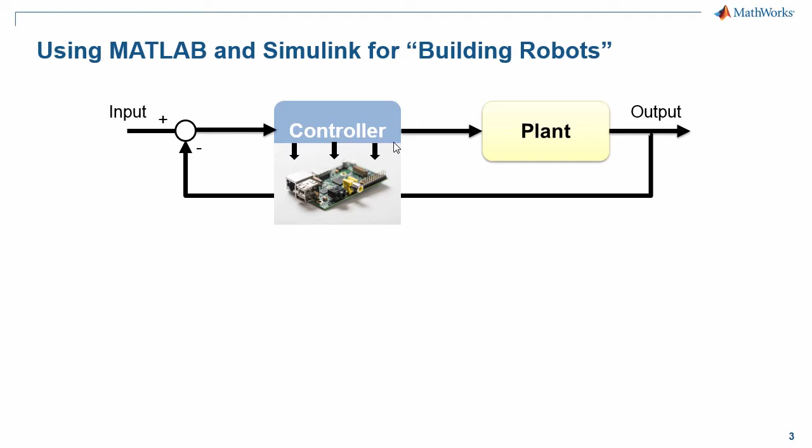MathWorks offers a comprehensive list of tools for modeling different types of robotics components. We already have customers that have adopted our tools for building their robots. We have the Festo Bionic arm here on the left side, and we have the DLR from the German Aerospace Institute humanoid robot. These two systems are advanced robotic systems, and as you can see, they perform advanced maneuvers, and the interesting part is that they are built using our tools.

So if you want to know more about this workflow, I invite you to check the webinar, How a Differential Equation Becomes a Robot. This webinar contains the details of this workflow.

Coming back to our classification, we have a second group, and that's the education space. Many professors contact me and tell me that they want their students to program a robot anywhere, anytime. This is an interesting challenge, so I see two options. The first one is to provide any student with a low-cost hardware robot, which could be a robot running on a Raspberry Pi or an Arduino board, popular low-cost hardware boards for robotics.

If this is the case, I'm happy to share that MathWorks offers a long list of hardware support packages so that students can program robots built with low-cost hardware inside MATLAB and Simulink. If you want to know more about this, please check this link that I'm showing you here on the slide.

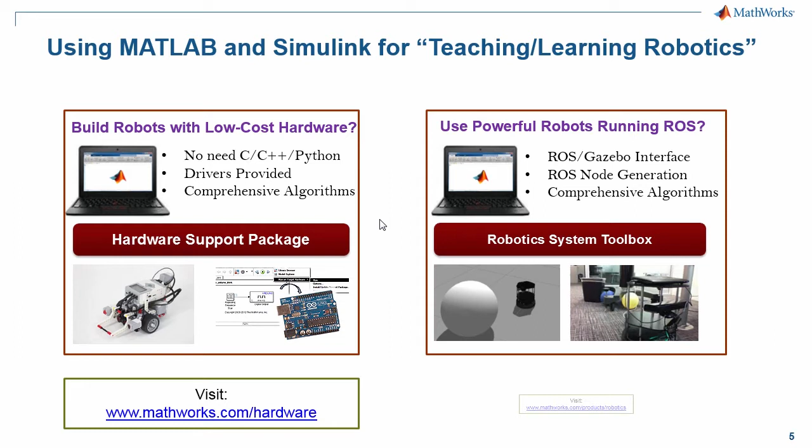But there's another option. Let's say you already bought a commercial off-the-shelf robot, which could be a more expensive piece of hardware, so it's very difficult to provide every student with this type of robot. But then you can leverage simulators. There are standard simulators nowadays that you can design your algorithm with. Professors want their students to design their algorithm using the simulator, and they want to have MATLAB and Simulink connected to the simulator. If this is your case, I'm happy to share that Robotics System Toolbox provides this functionality, but we're going to talk about this later on the webinar today.

The third group is also related to the previous one: you want to develop robotics applications using existing robots or simulators. Maybe you bought a robot, you already built your robot, and if this robot already has all the hardware components, you want to start developing advanced robotics applications. This is the core of my presentation today, and how you can use MATLAB, Simulink, and Robotics System Toolbox for this. Let me show you some examples of the type of applications that I mean.

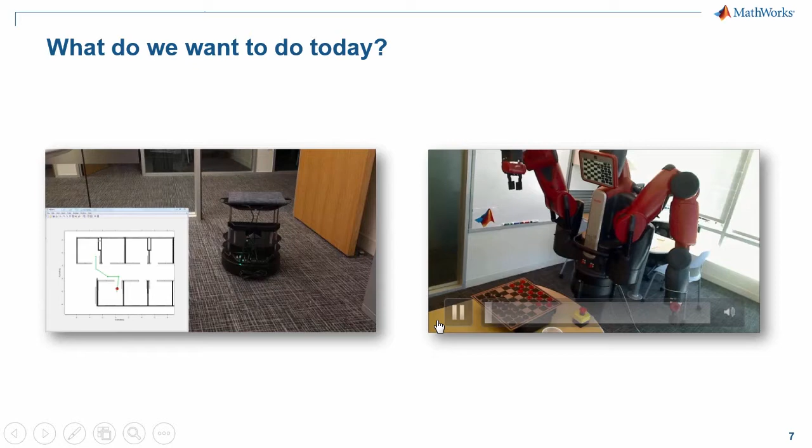Here you see on the left side of my slide a Turtlebot navigating autonomously through a floor plan using a representation of a map here in MATLAB. And on the right side you see the Baxter robot, playing checkers against a human.

So these two robots are commercial robots, and they share something, which is that they both provide a ROS interface, that is, the Robot Operating System. Now with Robotics System Toolbox you can connect to these two robots and develop your algorithm in MATLAB or in Simulink. For example, in these two examples I'm showing you here, the interesting part is that all the algorithmic part is running in a computer running MATLAB.

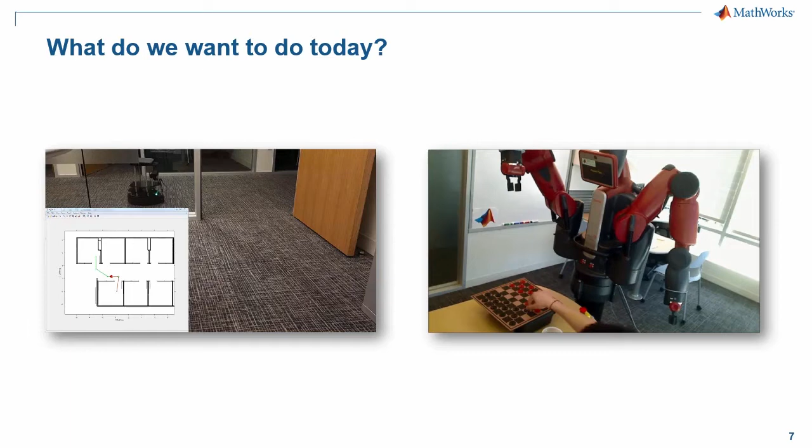So for example, on the case of the Baxter playing checkers, we are using functionalities provided by Computer Vision System Toolbox and Image Processing Toolbox to identify the board and detect the pieces. Then we are using MATLAB functions to actually move the robot and do some path planning, and finally send an end effector command so the robot can play checkers against a human.

These are just examples of the type of applications that you can develop, but of course it depends on your area. Some of you guys may be doing controls, maybe others can be doing computer vision, and others may be just interested in doing data analysis. All of this is possible now with MATLAB, Simulink, and Robotics System Toolbox.

So in terms of the agenda of the webinar today, I would like to start by showing you some features of the MATLAB ROS interface. How can MATLAB connect to the robot operating system? Then I will talk about some of the built-in robotics algorithms that Robotics System Toolbox provides. And finally, I'm going to talk about the Simulink ROS interface, because Simulink ROS interface allows you to connect Simulink, and also you can generate a standalone ROS node that can run on your robot.

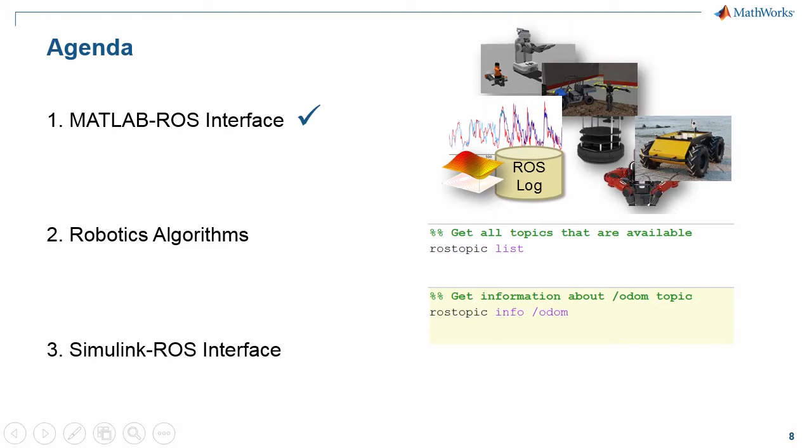So to start with the MATLAB ROS interface, let's ensure we have all the concepts clear. The interface to ROS-enabled robots and simulators is an important part of our toolbox functionality, as I mentioned. In case you are not familiar with the robot operating system, or most commonly known as ROS, I just want to give you a short intro. I know some of you may have already used ROS, but I also know some of you that probably this is the first time you hear this concept. So this is just a very short introduction.

At its core, ROS provides infrastructure for distributed communication in robotic systems. It's also called sometimes a middleware because it runs on top of Linux. The important thing is that ROS contains a collection of packages or libraries for solving common robotics problems. So this includes drivers to interface with sensors and actuators that are very commonly used in robotics, and it also provides some libraries for robotics algorithms.

So you may be asking, what does it mean when we say that MATLAB and Simulink are connected to ROS? Well, it means that now you can implement your robotics algorithms in MATLAB and in Simulink, and then use ROS to test these algorithms in a physical robot, or it could be also a simulator. So to assist you in the development of this type of algorithm, Robotics System Toolbox also provides built-in algorithms related, for example, to path planning and path tracking, which are very popular algorithms in robotics.

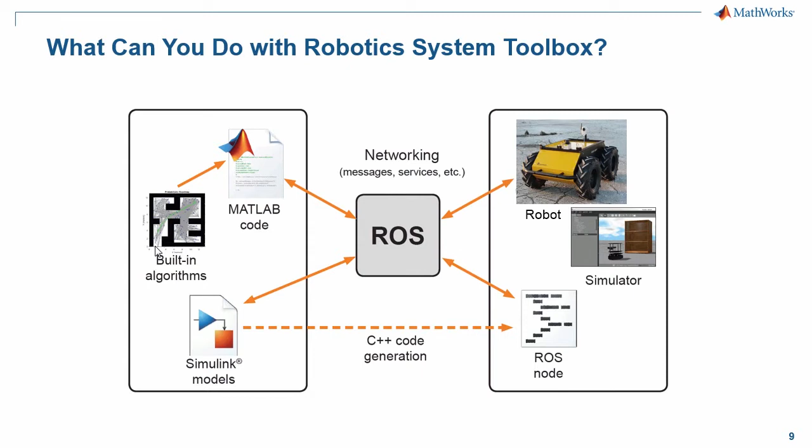So how do we pass data in ROS? And that's another concept that I want all of you to have very clear understanding of. There are two ways. Usually communication and processing in ROS happens through nodes, and you can exchange data through what we call ROS messages. There are two ways of sending and communicating data. ROS nodes can publish topics, and the nodes that are interested in getting that data subscribe to those topics. That's why we call it a publisher-subscriber scheme.

There's another way that it's a classical remote procedure call, and it's a client-server way of communication. That means that when the client needs information from a particular node, he requests that information, and then the service, when the information is ready and the data is ready, replies with a response, and then the client is happy because it gets its data.

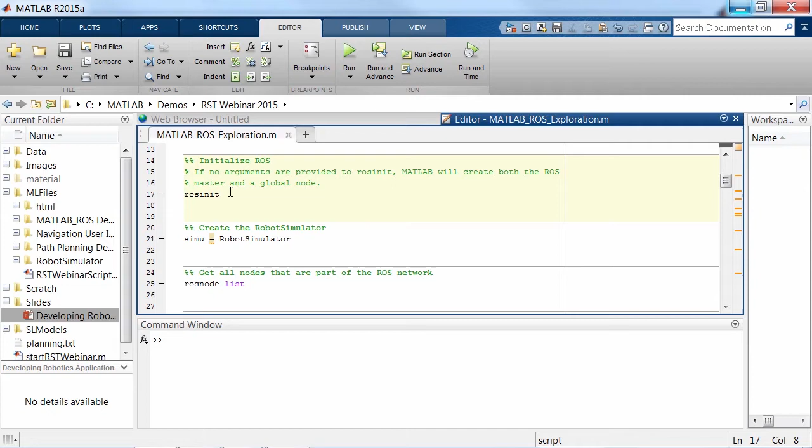The first function that I want to talk about is the ROS init function. This is a very important function because it allows you to create a ROS master in MATLAB or to connect to an external ROS master. If I want to connect to an external ROS master, you just need to specify the IP of that, which could be a robot or simulator.

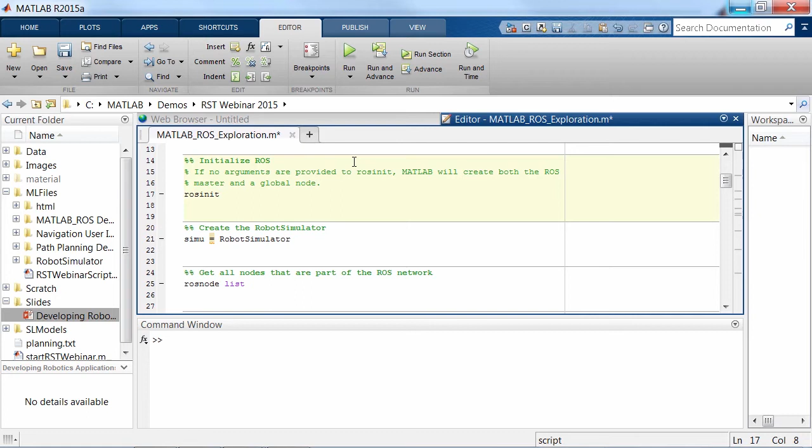In this case, I'm just making up some IP that will connect to that external ROS master. If you just call the function with no parameter, then MATLAB is going to initialize a ROS master, as you can see, and initialize the global node in MATLAB.

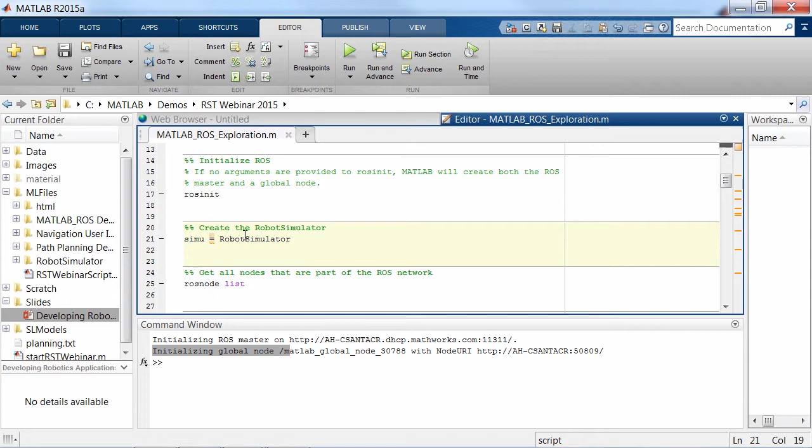Now I'm going to create an instance of a robotic simulator that we created in MATLAB that provides a ROS interface, also using Robotics System Toolbox functionality. I'll accommodate my screen so you can see both MATLAB and the robotic simulator, so you can see what this means. It's a mobile robot simulator, as you can see on the figure, with a laser range scanner simulation, a bumper sensor simulation, odometry sensor as well, and it's a differential drive robot.

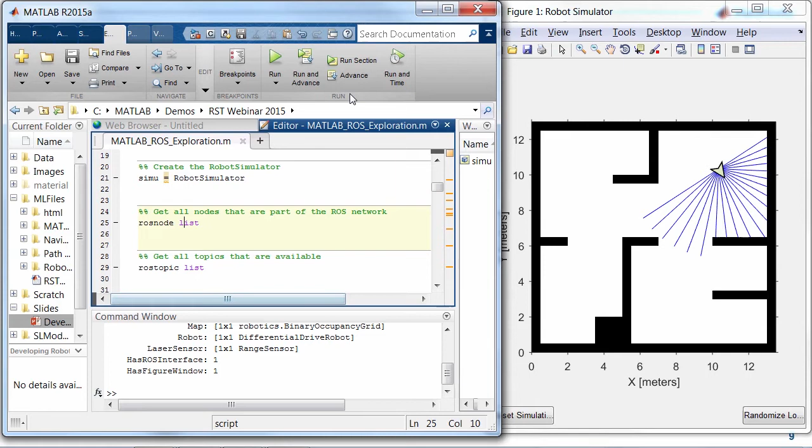If we now execute ROS node list, you see that the only node on the ROS right now is the MATLAB global node. How about ROS topic list? We execute this piece of code and we see these 5 topics corresponding to the velocity, which is the topic we publish to move the robot, the bumper sensor simulation, the odometry topic, ROS out, which is standard, and the laser range scanner topic.

If you want to obtain more information about a particular topic, we use ROS topic info, and that will tell us the type of message that the topic uses for transmitting data, as well as the nodes that are publishing to that topic. In this case, it's just the MATLAB global node and no subscribers.

We also have the echo functionality if you want to get data immediately about a particular topic. Let's see, for example, here in the case of the odometry topic, and we see the position and orientation of the robot. In this case, the robot is at 10.33, 10.34, and visually we can effectively verify that the robot is in that location.

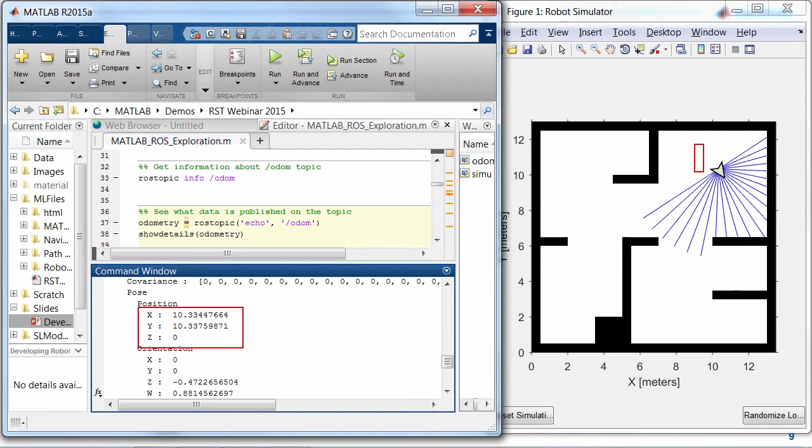Let's continue exploring some of the functions. You also have the ROS message show functionality if you want to get more information about a particular message. In this case, let's get more information about the sensor message laser scan, and that tells you the different parameters that that message has.

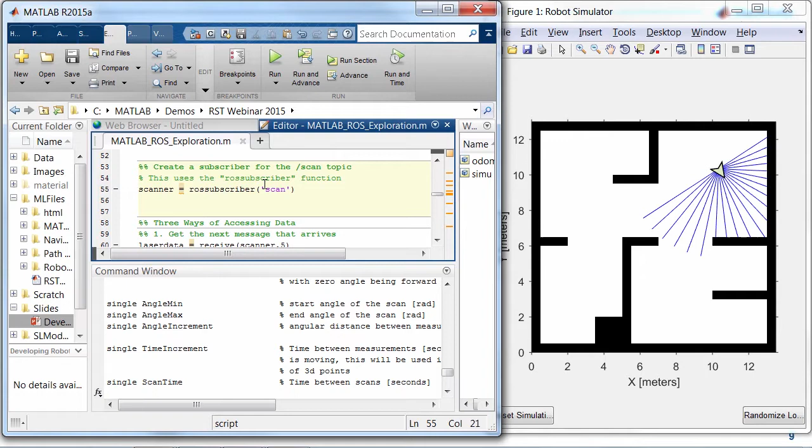If you want to get data now from the robot or simulator, we have to create a subscriber. In this case, let's create a subscriber for the scan topic, and we name it scanner. If we verify here on the MATLAB workspace, we effectively see that it created a subscriber object.

So in this case, let's just use the receive function. This 5 is just a timeout that you can specify. So now we got the data of that message. If I type here in the command window laser data, we see the different parameters of that message, the different information.

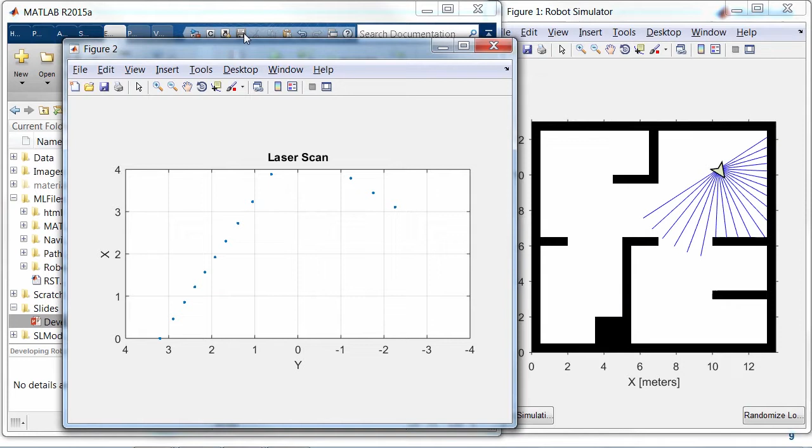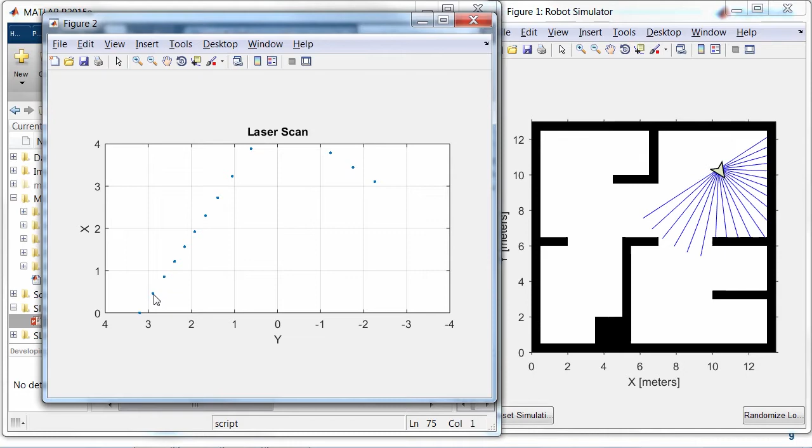Let's say that now we want to visualize that data. For advanced data types, we have some overloaded functions. For example, here, look that we are using the plot function directly on the scanner.latest message object. If we execute this function, we actually see the plot of what the laser range scanner is returning. On the right side, we effectively see that the robot is in one corner, and that's what the XY plot of that message is showing us.

So that's for getting data from the robot. What about if you want to send data to the robot? In that case, we need to create a publisher. We use the ROS publisher function in order to do this, and we specify the topic we want to publish to. If I execute this piece of code, this returns 2 objects: the publisher itself and the message that you're going to use to publish to that topic.

Now we configure the message. In this case it's velocity, so I specify the linear velocity and the angular velocity, and then we use the send function, using the publisher and the message, to actually send data. If you pay attention to the simulator, and I'm executing this piece of code multiple times, you see that the actual robot is getting the information and moving accordingly to the information on the message.

Let's reset that message, send a zero command to the robot. And now let me show you how easy it is to create a simple algorithm.

In this case, I just have a while loop. I'm getting the sensor data from the laser range scanner, and I'm detecting if I'm close to a wall or not. If I'm not close to a wall, I drive forward and send a linear velocity command, as you can see from the simulator. If I detect the wall, the robot should stop in order to avoid a collision.

So let's see if that's effectively what happens. It goes straight, and it should detect that wall at some point. And now it detects the wall and it stops. So that's just an example of how easy it is to start prototyping and creating your own algorithm.

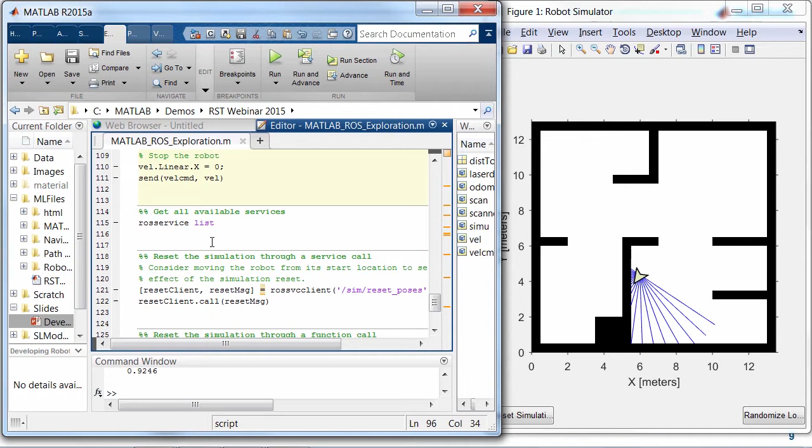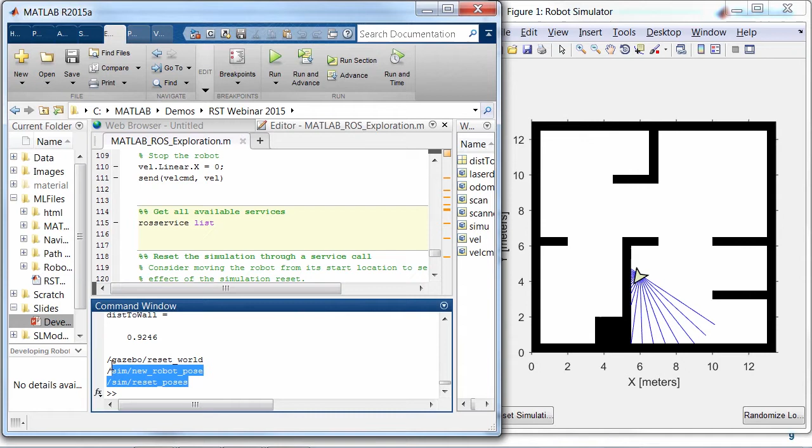So you might be asking, okay, do we support services from MATLAB? Yes. If you want to see the services, you use ROS service list, and that shows you the services this simulator has. In this case: reset world, new robot pose, and reset poses.

And if you want to call that service, you use the ROS SVC client function. You specify the service name, and then we call that service. And if you notice, the simulator went back to the initial pose before I started moving the robot, because that's what this service functionality provides.

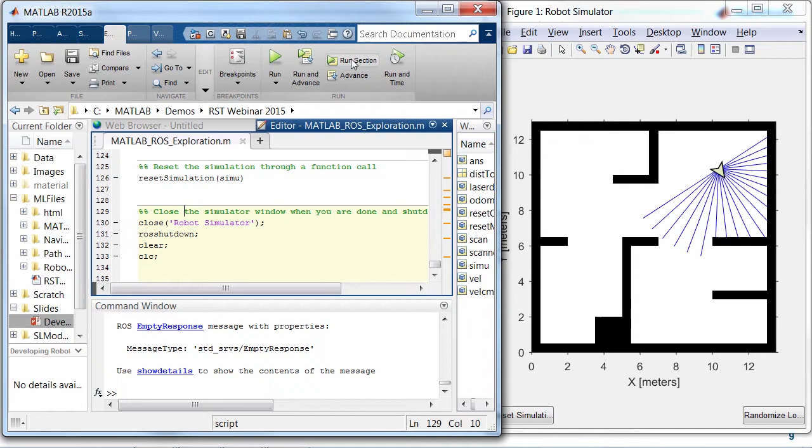And finally, we want to close and shut down the network. We use the ROS shutdown function for that, and that disconnects from the ROS master that we created in MATLAB. So that's one important functionality.

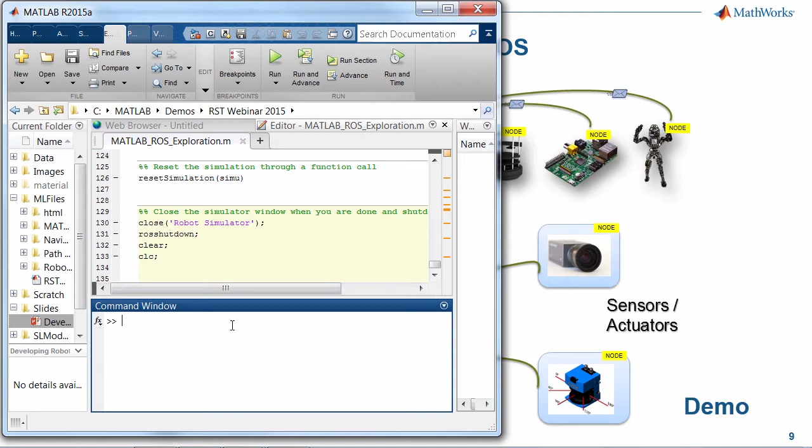Now I want to show you another functionality related to importing ROS bags into MATLAB. Let's open another script that I use to showcase the basic functionality of the ROS bag import.

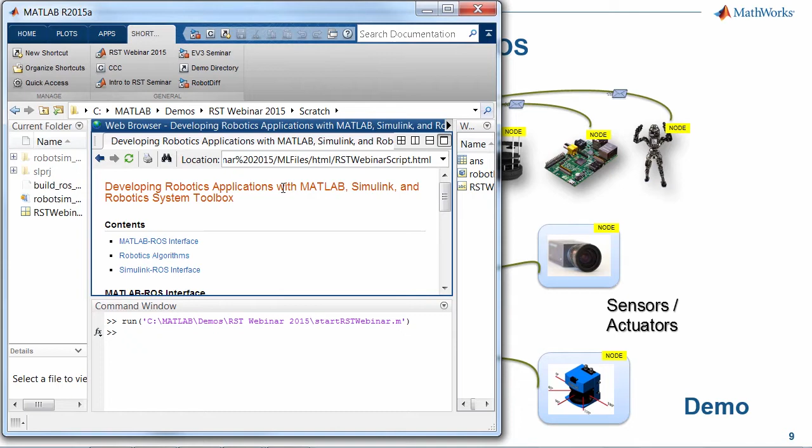So I already have a ROS bag that I recorded. I believe some of you already have ROS bags that you've recorded from hardware or from simulators. In my case, my ROS bag is robot_circle.bag. And with the ROS bag function, I load the file.

One important thing is that we are not actually reading all the data from the ROS bag, because as you know, ROS bags tend to occupy a lot of space in memory. So we are just loading the file. Later, I'm going to show you how you can specifically read the messages from the ROS bag.

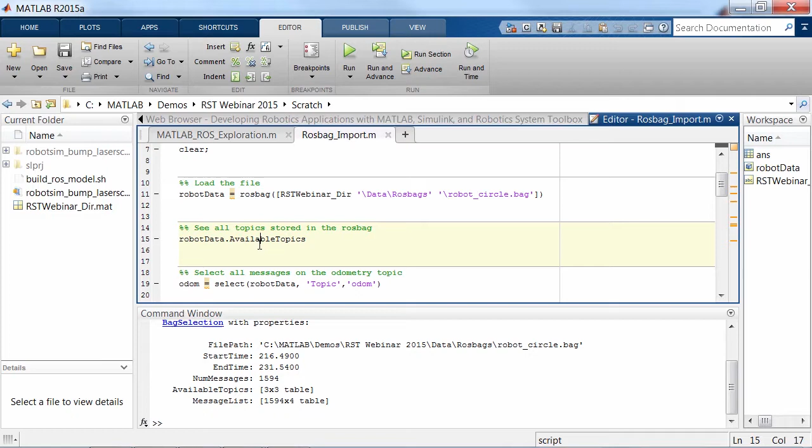So now we see that this is a bag selection object with these properties: the starting time, the end time, number of messages, the available topics, and the message list. Let's explore the available topics.

So here we can see that we actually recorded three topics: the camera depth point, the odometry topic, and the scanner topic. Let's select a particular topic. In order to do that, we use the select function.

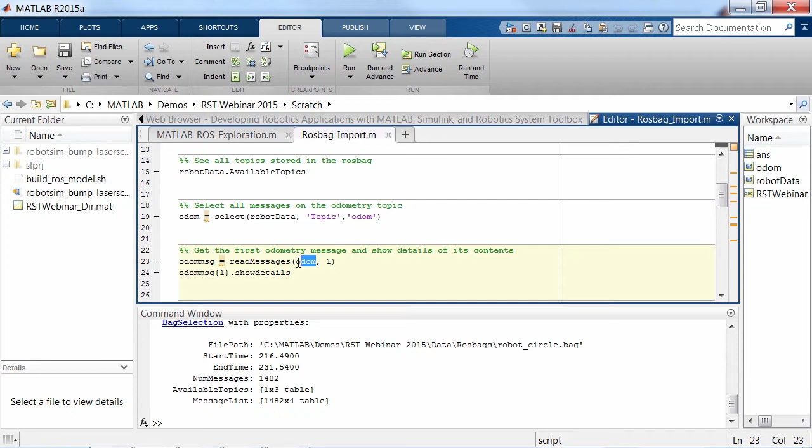And if we want to read the messages, we use the read messages function applied on that ODOM object that we created in the previous step. So let's execute this piece of code. And then I'm saying, okay, as a cell array, show me the first instance, show the details, so we can see the information of that message of the odometry topic.

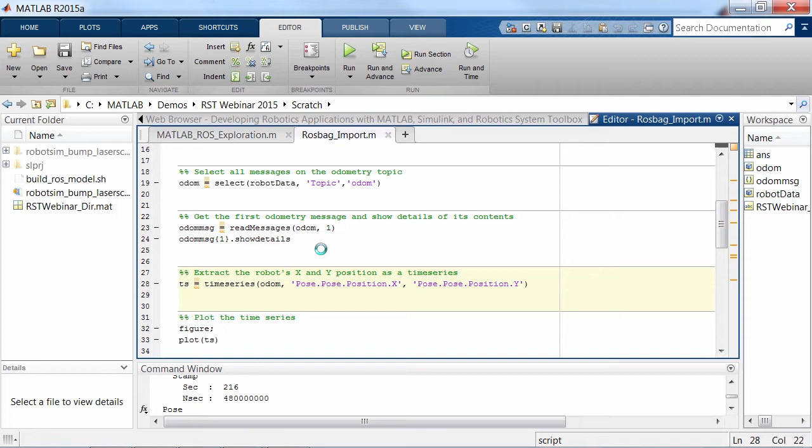We can also read it as a time series. So for example, here we can read the XY position as a time series. This piece of code converts that information to a TS object, a time series, and we can visualize the data of the odometry topic quickly.

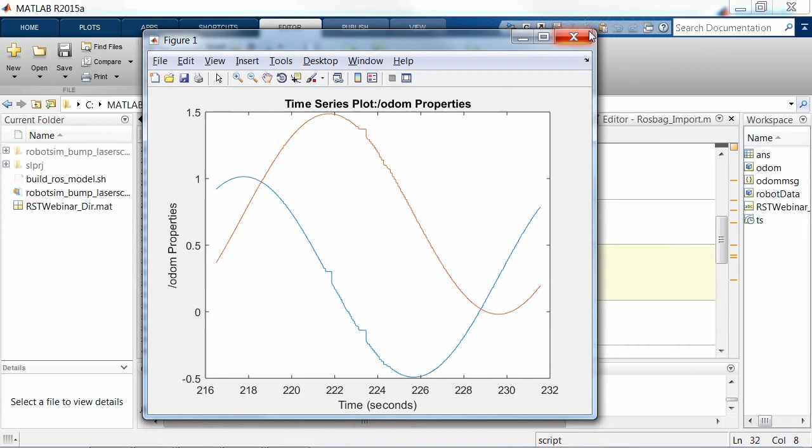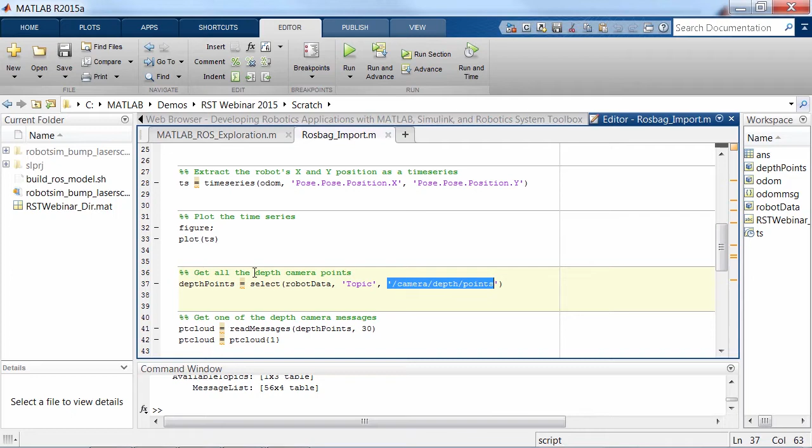Let's see a more advanced, more interesting topic: the camera depth point. As well, we use the select function to get all the depth camera points. Then we're going to get just one of those messages with the read message function. And then we use our scatter3 function to visualize a point cloud.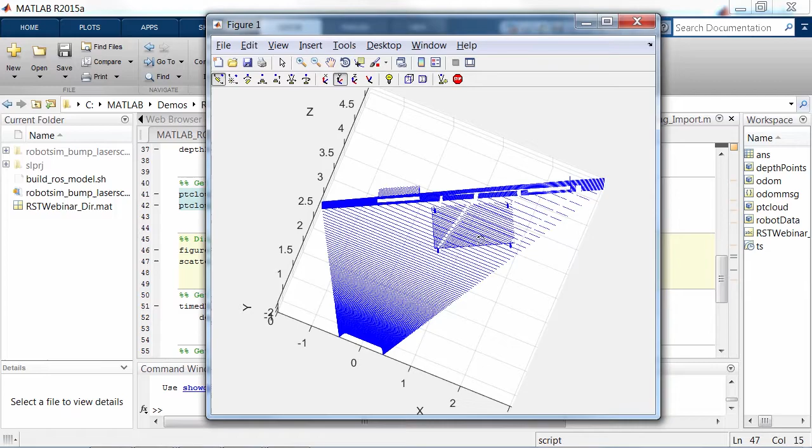And if we execute this function, now we can see what the actual robot was looking at. So we see it was like a table in a corner, that's the image. This is a very powerful feature, being able to quickly visualize the point cloud.

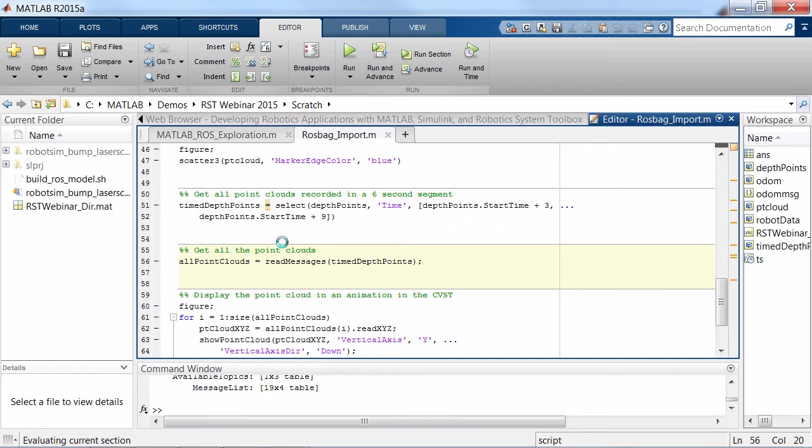Let's select a bigger piece of data. As well, we use the select function. As you already know, we use the read messages function to get all that point cloud. And then we can use and leverage computer vision system functionality to visualize the point cloud as an animation. So as we can see here on the slide, we actually see what the robot was looking at, the full scene there.

Finally, we can close and clear all our data. So those are the features related to ROS bag functionality.

Coming back to my presentation, we showed how to create ROS nodes, publishers and subscribers using MATLAB ROS interface from Robotic System Toolbox, how you can call and provide services. You can also access the ROS parameter server. I didn't show this on my scripts, but it's also a capability. You can also have access to the ROS transformation tree. And as we saw, we have the powerful feature of reading, filtering, and extracting messages from ROS bag files.

So let's go back to our agenda. Our second item today is about robotics algorithms. Robotic System Toolbox provides built-in robotics algorithms that can help you to develop this type of robotic application. As you can see, is the Turtlebot going from one point to another and using a map in order to achieve this.

An important thing to mention is that these robotics algorithms do not depend on ROS. Of course you can test them using a robotic simulator or a robot that runs ROS, but the algorithms itself do not depend on ROS. So let me switch to MATLAB so I can start showing you how you can develop this type of application.

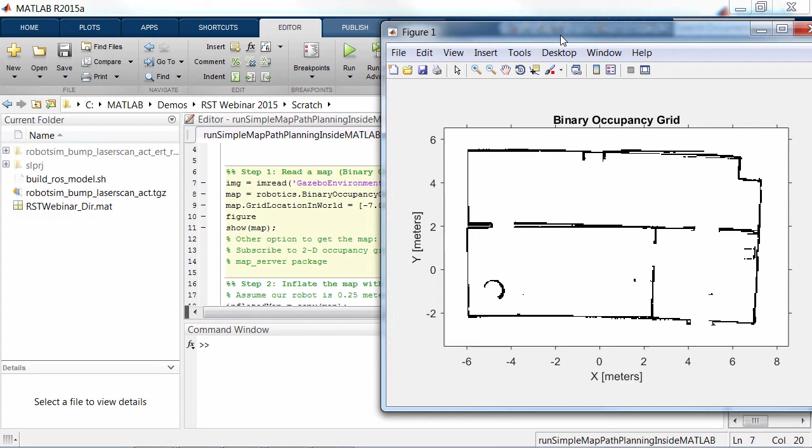I'm going to open a script here in MATLAB that contains the main features of the algorithms that come with Robotic System Toolbox. I'm going to accommodate my window so we can visualize my MATLAB and the image or the figures that we create on each step of the script.

So here on this line of code, I'm just reading an image file, and that image file contains the image of this floor plan. And then we created a binary occupancy grid object. That is one of the objects that comes with Robotic System Toolbox. You specify the resolution, and what that does is basically, as you can see here, this is the image, but it contains dimensions as well.

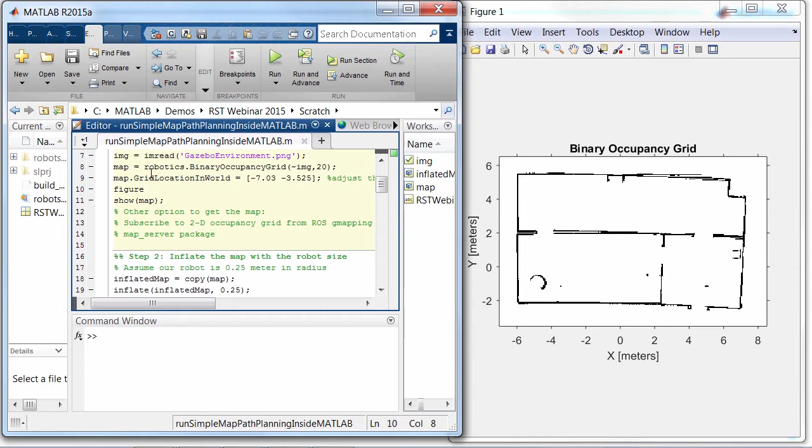So now we have a map representation where that binary occupancy grid, you can see it as a matrix where a 1 represents that the space is occupied and a 0 represents that it's empty. So it's very convenient because you can use this representation to do path planning. And after creating this map or binary occupancy grid, you can visualize it by using the show command, as I'm showing you here on my script.

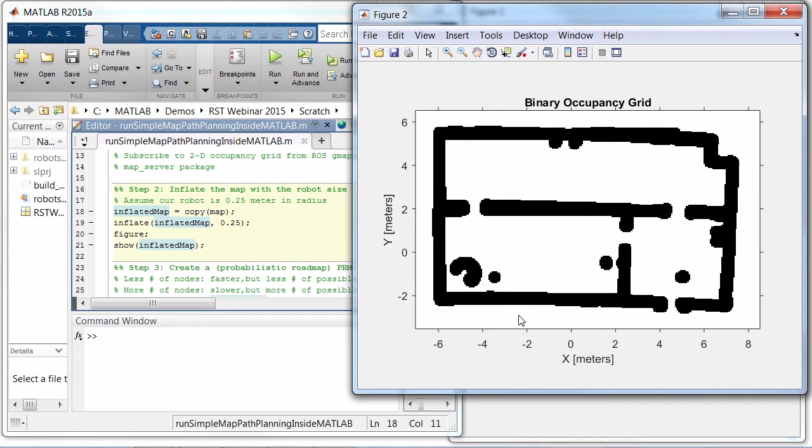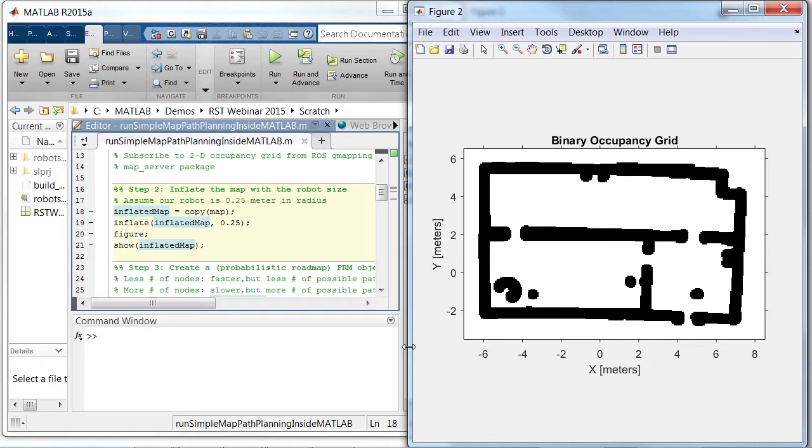Now we're going to inflate that map. As you can see on the figure, basically we make the walls and the obstacles thicker, just with the objective that we want to consider the robot as a point object. Instead of considering the geometry and width of the robot, we just make it a point and we make the walls and the obstacles thicker. Again, this is also a standard method in robotics.

Now we want to do path planning, so we can create a probabilistic roadmap planner. That's a standard planner in robotics. In order to do this, we create the object from Robotics System Toolbox called a PRM. It receives as an input that map that we inflated, and we specify some parameters, the number of nodes.

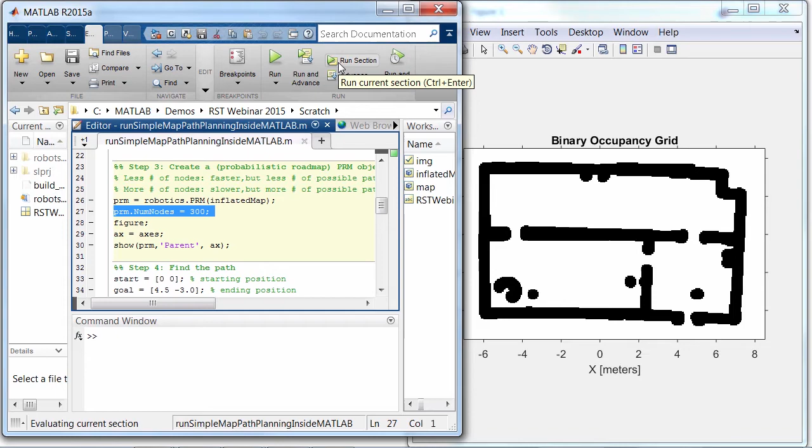As you can see here on my figure that is going to be created soon, you will see how we place nodes randomly on the environment. What's the idea behind this? You can see that the image also shows that those nodes are connected with lines. But if you pay attention to the figure, you will notice that the lines are collision free.

Because remember that our objective is to do path planning. That means that we want the robot to go from one point of this map to another point, of course, without colliding. And this PRM object, you can also visualize it, as you can see here on the figure.

The next step is we want to specify a starting location where the robot is initially, let's say the 0 position, the end location, and then we use the find path command from that PRM object, specifying the start, the goal. So if we execute this piece of code, now you see here on the right side the actual path. So this is the 0 position, and this is the goal location.

Now we found the path. These are represented by these X, Y positions of these nodes. And this is what the robot should follow in order to go from the start to the end location. So that's one part of the problem. Now you may say, Carlos, but we actually need some kind of controller so it drives the robot along that path.

You are correct. So that's why you can use from Robotic System Toolbox the Pure Pursuit object. This is also a traditional method in robotics in order to drive a robot through a path. So the input is the path of this controller. As waypoints, you specify the path that the PRM found. And then you can configure some parameters like the desired linear velocity, the maximal angular velocity, and the look ahead distance that are parameters of this controller.

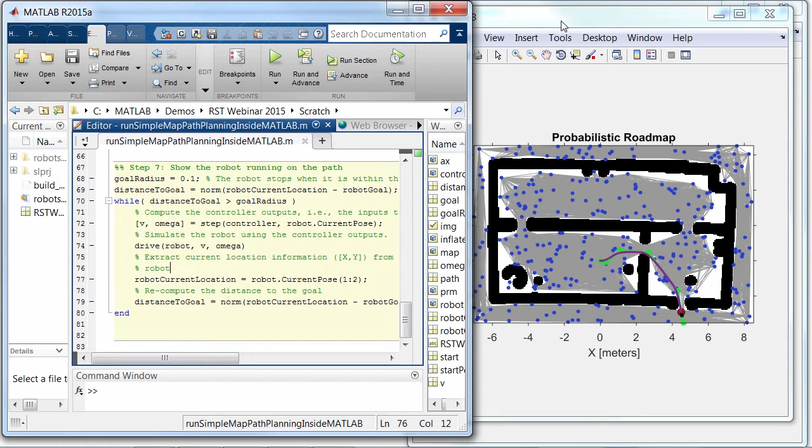So as you see here, we prototype our algorithm just using MATLAB, right? We have everything here in MATLAB. But at some point, we might be interested to connect to a robotic simulator. So actually, I have a robotic simulator, and I'm going to show you how you can, with the same code, test it with a real robotic simulator.

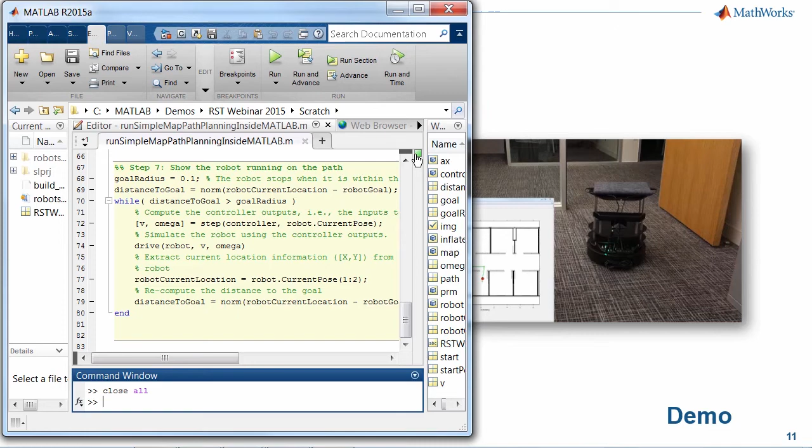So I open here, I have Gazebo, and it has the Turtlebot, as you can see here. And maybe you already realized that the floor plan that I showed you before corresponds to the floor plan of this environment. So I'm going to open another script that shows you how we can connect to Gazebo, but let me show you this interesting thing first.

So I'm going to show you both of the scripts, the one that I showed you before, and this script that we're going to use to connect to Gazebo, on the same screen. Why? Because the first 6 steps of these two scripts are exactly the same.

As you can see here, first we read the PNG file, we inflate the map as I showed you before, we create a PRM, then we create a pure pursuit controller, we find the path. So the only difference with this script is that here we are also connecting to Gazebo.

So that's why I specify the IP address of my virtual machine. I'm going to show you later how you can do this. And then it's the same while loop that I showed you before that drives the robot. And of course here, because we're using Gazebo, we use Robotic System Toolbox MATLAB ROS interface to send that linear velocity and angular velocity to the robot. But other than that, it's the same script as I'm going to show you now.

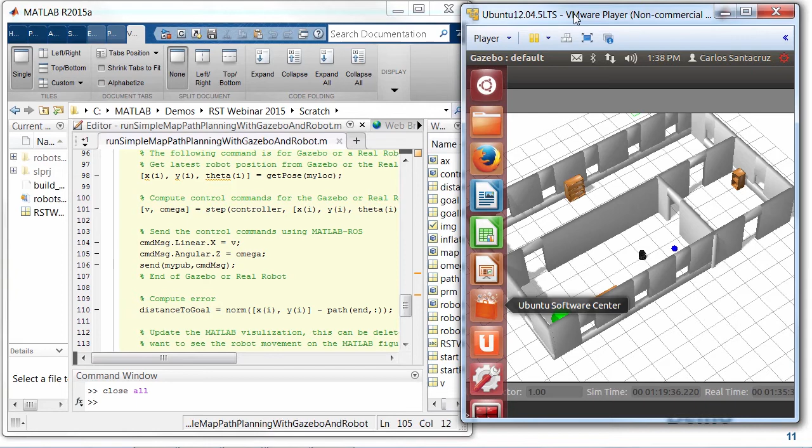So let's execute this script, but I want to show you at the same time my robotic simulator and my actual script. As I said before, if you want to verify the IP address of the robotic simulator, this is a virtual machine, so you can just access the command window and execute ifconfig. So let's execute this file and see what happens. I'm going to run the whole file all at once.

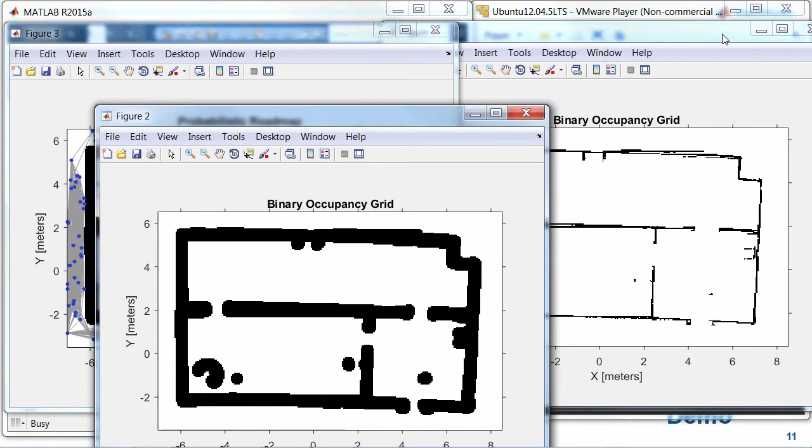So as you're going to see, it has to show me the same visualization that you saw before in order to do all the path planning. So now we're reading the image, it's doing the path planning, it's creating all that object. And now here you can see my actual MATLAB simulation, but you can also see on the right side the Turtlebot navigating through the environment and going from the 0,0 location and going out of the door. That is what it's supposed to do.

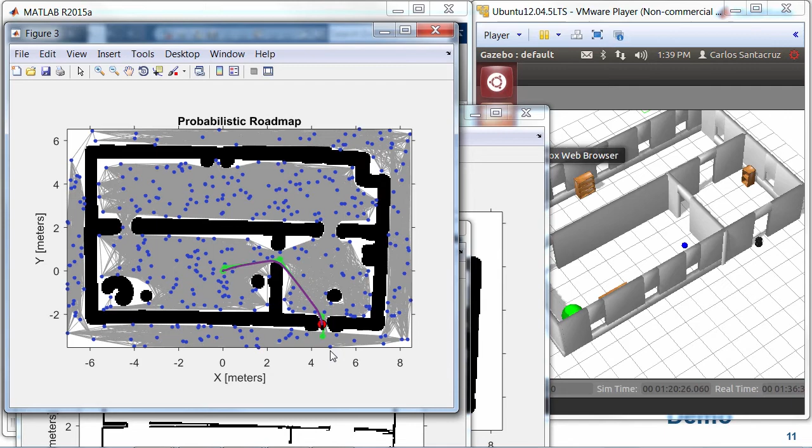Remember that all the algorithm was prototyped, created, developed in MATLAB, and we are also using the built-in robotics algorithms related to mobile navigation that I showed you before. So as you can see, this kind of co-simulation workflow is very powerful, and there are many applications that you can start developing using this functionality.

So now I would like to go back to my presentation. I showed you the different robotics algorithms provided by Robotic System Toolbox and how you can use them to design cool robotics applications. Now I would like to continue with the final item of our agenda.

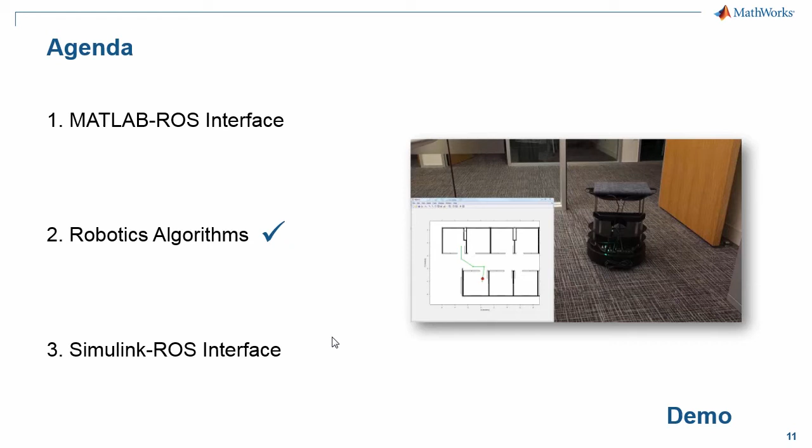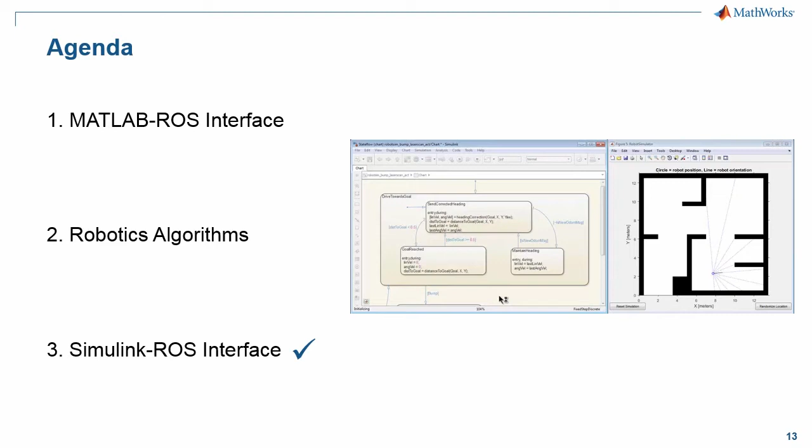And that's the Simulink ROS interface. I'm sure this is going to be very interesting for you guys because many of you design robot controllers or robot algorithms in Simulink. For this interface, I would like to emphasize a 3-step workflow. The first one is, of course, to design your algorithm in Simulink.

The second step is that you can test your algorithm either in Simulink with a MATLAB-based simulator, that's the one I've been showing you throughout this webinar, or you can connect to an external simulator such as Gazebo, which I've also shown you today. After testing, if you have our coder tools, you can generate a standalone ROS node from Simulink, meaning you can generate C++ files that run in standalone mode on the simulator or on the robot hardware. So this is a very powerful workflow.

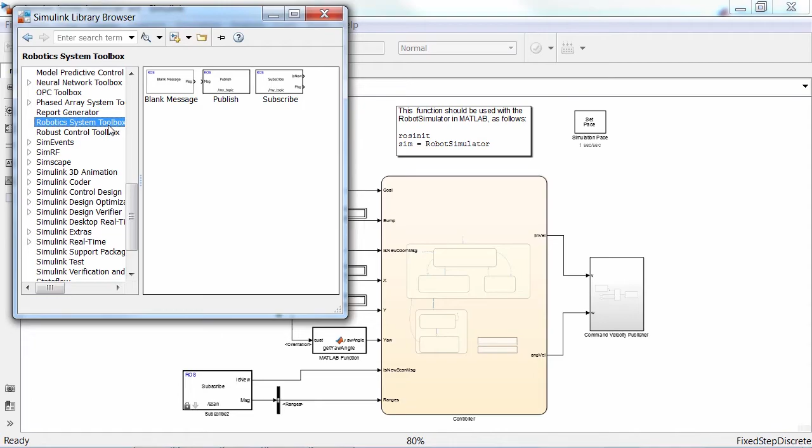I know you're very interested in seeing this, so let's switch to Simulink. I'm going to open a Simulink model I created that has blocks from Robotics System Toolbox. If you open the Simulink library browser and go to Robotics System Toolbox, you'll see three blocks: the blank message, the publish, and the subscribe.

So how do we use those blocks? Let's use this model to explain. What I really like about Simulink is that you can clearly visualize the different components of your model. Here we have the communication layer in charge of getting data from the robot, the algorithm that takes that data and computes an output, and here the communication layer in charge of sending data back to the robot.

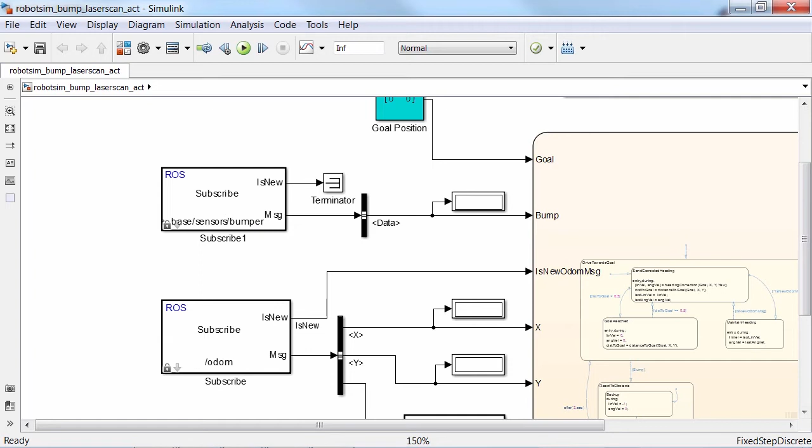To get data from the robot, we use the subscribe blocks, subscribing to different topics: in this case the bumper, the odometry, and the scan topic. To send data to the robot, we publish. We're using a publish block, create a blank message of type twist, configure the message, and publish that data to the command velocity topic. Our algorithm is here in the middle.

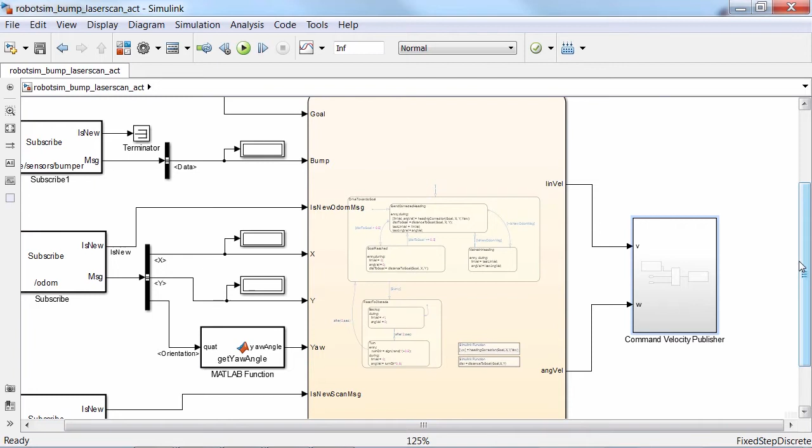In this case, I'm using a Stateflow chart. For those who haven't used Stateflow, it's our library in Simulink specialized for modeling instantaneous events, finite state machines. Most of us here are roboticists, so you know finite state machines are very commonly used in robotics. In this case, this algorithm just drives the robot to an XY position.

It has a routine in charge of correcting the orientation based on the odometry data and the desired orientation. It computes a desired angle, a linear velocity, and an angular velocity. It also has an obstacle avoidance routine, so if we collide with a wall, it corrects the orientation.

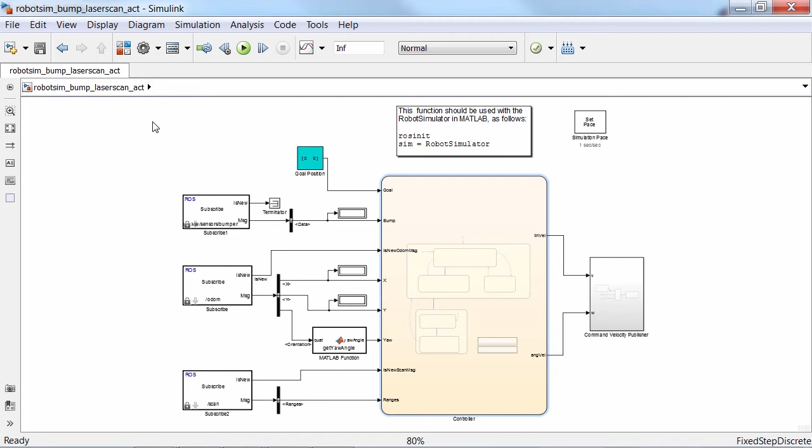So we want to test this algorithm. What's the idea here? First, we can use a MATLAB-based simulator to do this. I'm going to use the one I've been showing you before. Let's go back to MATLAB. I'm going to initialize a ROS master and a global node in MATLAB, and create an instance of that robot simulator.

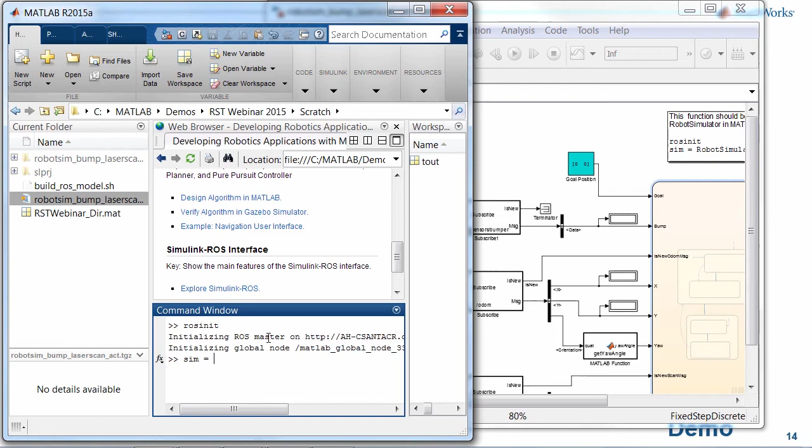Here's the robot simulator, and I'm going to bring my Simulink model to show both at the same time. You of course need to configure that network address. In Simulink, you go to Tools, Robot Operating System, Configure Network Addresses, and ensure it's the default. If it's the default, Simulink will use the ROS master URI, or the local host, as in this case.

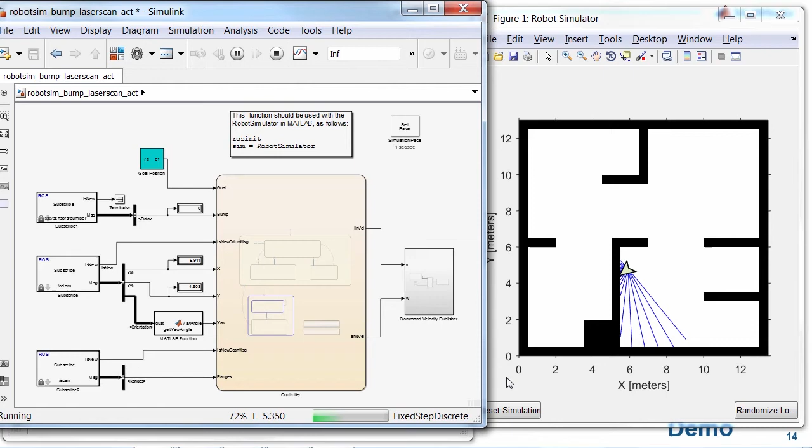Now we hit play. As you see, the robot is trying to reach, in this case, the 0,0 location that is here on this corner. But that's a very tough one, so let's make it easier. I'm going to stop my simulation.

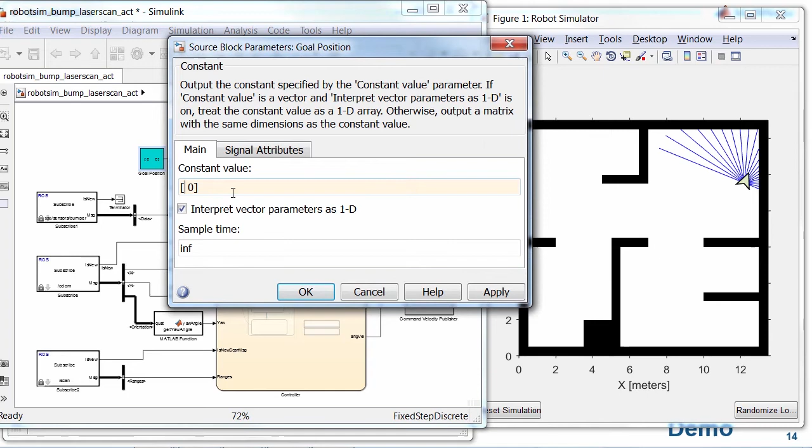Let's go to randomize location to make it a more interesting starting location. I think that one is good. Let's try to reach the 8,8 location. We say 8,8 is my desired location, and we hit play. Now the robot should try to reach the 8,8 location, and it's correcting the heading and trying to reach that position.

Probably that one was too easy. Let's try a harder one, and at the same time I'll show you the Stateflow chart. Hopefully it collides with the wall. So here you see it collides, it switches to the other state. Stateflow shows me the different state the state machine is in, and now it's switching between these two states until it reaches the 8,8 location. Then it reached and stopped, so goal reached.

So that's one part of the algorithm. We designed the algorithm, we tested our algorithm, in this case using the MATLAB-based simulator, but we can also use an external simulator. So I'm going to close here my MATLAB-based simulator.

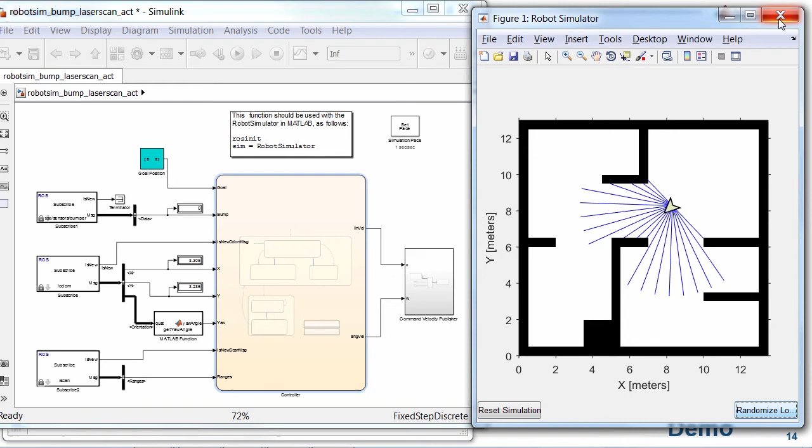I'm going to bring back my virtual machine with Gazebo. I still have my Turtlebot here, but I have a different environment. This is an open environment.

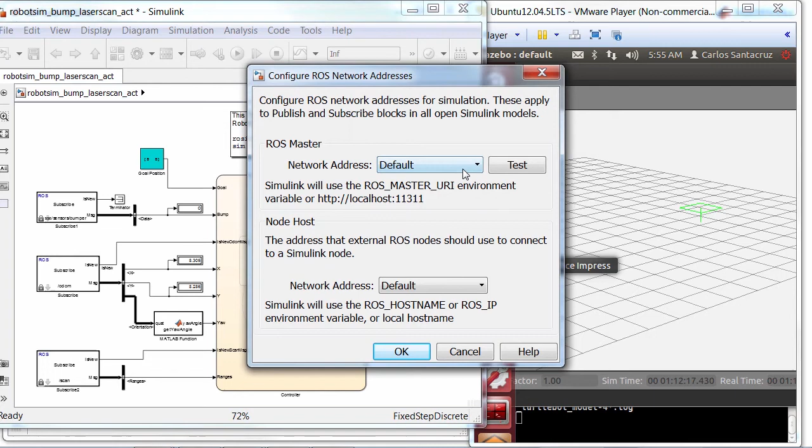To test it with the external simulator, I can use exactly the same model, with the only difference that I need to connect to an external ROS master. So I go here, I say custom, I specify the IP of my virtual machine. In this case, that's the IP. I hit OK, I hit play, and I should expect my Turtlebot moving and trying to reach the 8-8 position, and effectively that's what it's doing. So as you noticed, I just changed the IP and I could test with the external simulator.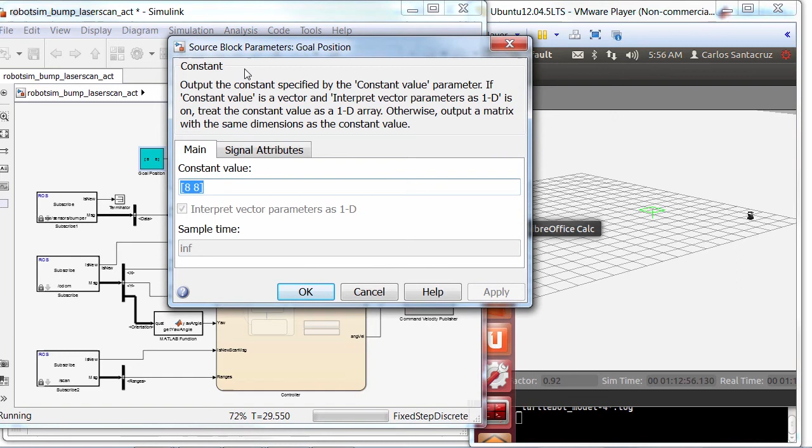That could be the hardware, of course, if you want to test directly with the hardware. But remember that one of the advantages of simulation is that you can test all sorts of crazy stuff and design your algorithms without having to test on the actual hardware. That could be expensive. So for example, here I can change again the desired orientation.

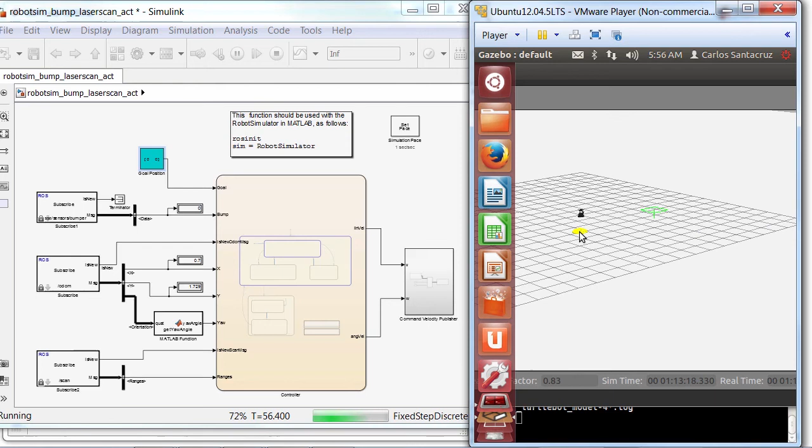Let's say I want to go to 0, 0 again. And then the robot goes to 0, 0. So now I'm just changing the goal position, but imagine that this is a controller. You can change the value of the gains and see on the simulator how changing that value is actually changing the behavior of your controller. So here the robot is trying to reach the 0, 0 position, and it arrives to the initial position.

So we can stop here our simulation. And now it's a good time to switch to the final step of our workflow, the one that I emphasized at the beginning. If you remember, that was: if you have the coder tools, you can actually generate a standalone ROS node. So how does that work?

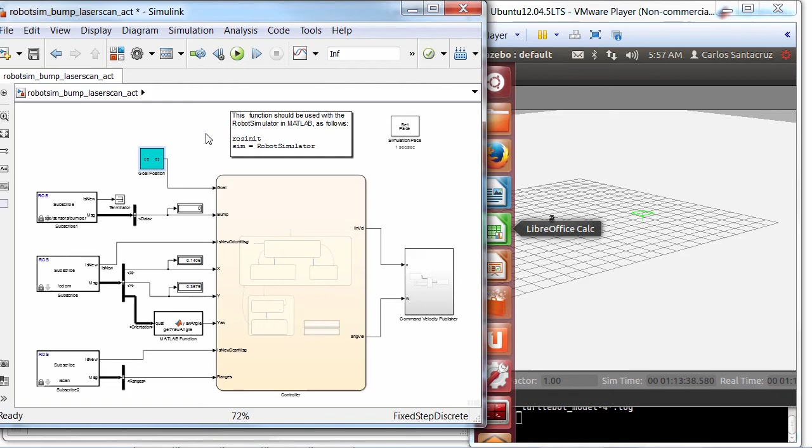If we go here to simulation, model configuration parameters, I want to show you the options you will have right now. As target hardware, we have the robot operating system. We have the tool chain, which will be Catkin. And if you hit the build button, that will generate two files, which I have already done for the sake of time, in your current directory.

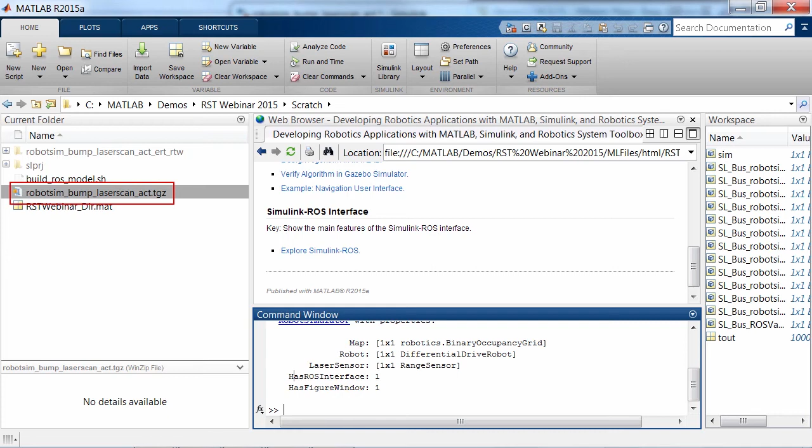So here, if I go back to MATLAB, you will have these two files. First, it will be a Linux shell script. And the second one is this compressed file that will have your model name and the TGZ extension. But if you just explore the contents of that file, you will see that it contains the CPP and .h files that were generated, corresponding to your Simulink model.

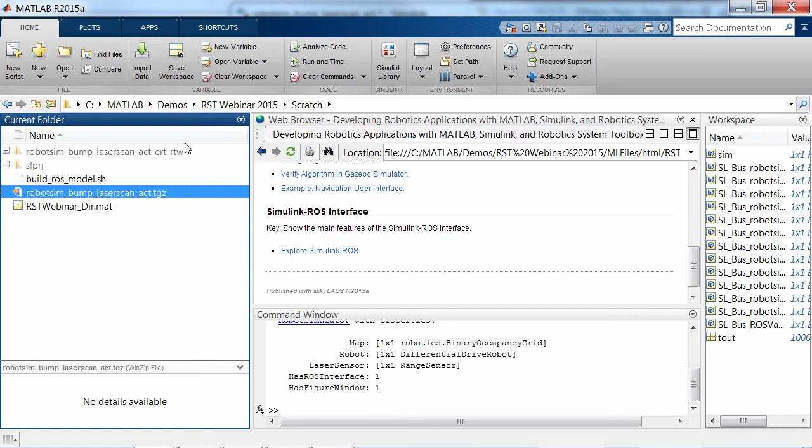So what's the idea? The idea is that now you deploy these files to the hardware, to the ROS system, or to the simulator itself. Because I'm showing here my demo with a virtual machine, the idea is that you need to deploy this to the virtual machine. You can do this using standard Linux SCP commands, or if it's a virtual machine, most of them support drag and drop. So I have already done this.

So I'm going to show you here my virtual machine. Here I have the two files, right? The sh Linux shell script and the compressed file that contains all the CPP and .h files. And the idea here is that you need to execute that shell script. You point to the TGZ file and you create a Catkin workspace. In this case, my Catkin workspace is named catkin_ws_simulink.

You hit play. So what's happening right now is that Simulink is taking all those files, compiling them, and building a standalone ROS node. So now you see the process, it's almost done, it's 100%, and it finished compiling and building that ROS node.

So the first thing you can check here, this is all the C++ and .h files in the source directory of your Catkin workspace. And then if you go here to the lib directory, you will see the actual object, or the generated standalone ROS node. And why is this powerful? Well, because now...

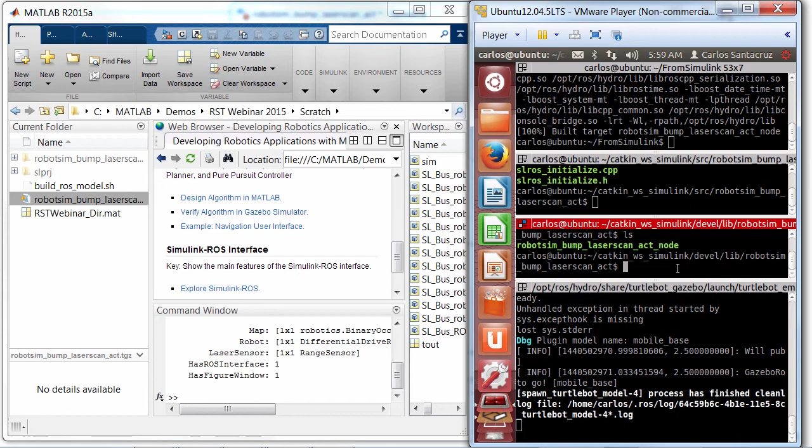You can actually execute this ROS node. So as you recall, I stopped my Simulink model. So I'm going to execute my ROS node and I'm going to show you the simulator.

You see now that the ROS node is being executed in standalone mode. So that means it's running on the Linux system, on the ROS system, and it's reaching the 8-8 location, right?

So as you can imagine, this is the final step of our workflow. It's very powerful. Just to recall, let me switch back to my slide that had the 3 steps.

First, I show you how you design your algorithm in Simulink. In Simulink it's very nice to see how everything is separated as a communication layer and your algorithm itself - you get data, you do something with the data, and then you send that data back to the robot.

We tested the algorithm using a MATLAB-based simulator, or with Gazebo as well, having Simulink connected to the simulator. Finally, when we were satisfied with our performance, we generated a standalone ROS node from Simulink that could run on the system itself, or if you have the hardware, you can actually just run it from the hardware. So this is a very powerful workflow, and that's one of the key features of the Simulink ROS interface.

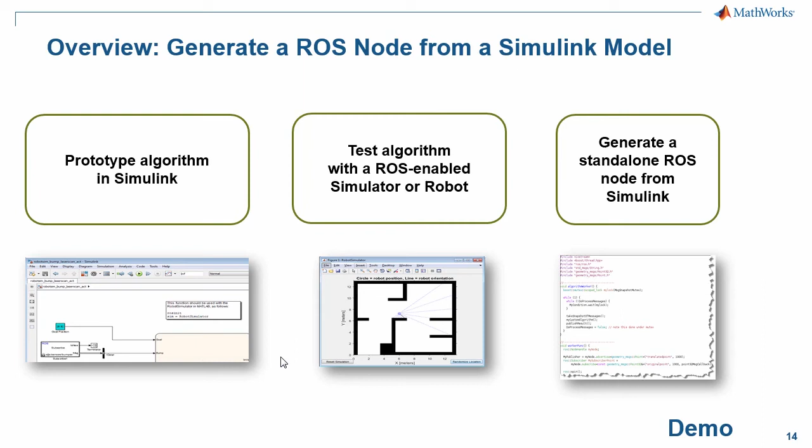So fellow roboticists, we just covered the three items of our agenda for today. To recap all the interesting things I showed you: we talked about the MATLAB ROS interface and how now you can create ROS nodes, publishers, subscribers, and services from MATLAB, and how you can design and

test your algorithms in MATLAB, as well as how you can connect to external robot simulators such as Gazebo and VREP. And if you are satisfied with your performance on simulation, you can test your algorithm with a physical robot just by changing the IP address you're connecting to. And if you have data you have recorded from the robot or the simulator, you can also import ROS bag log files into MATLAB.

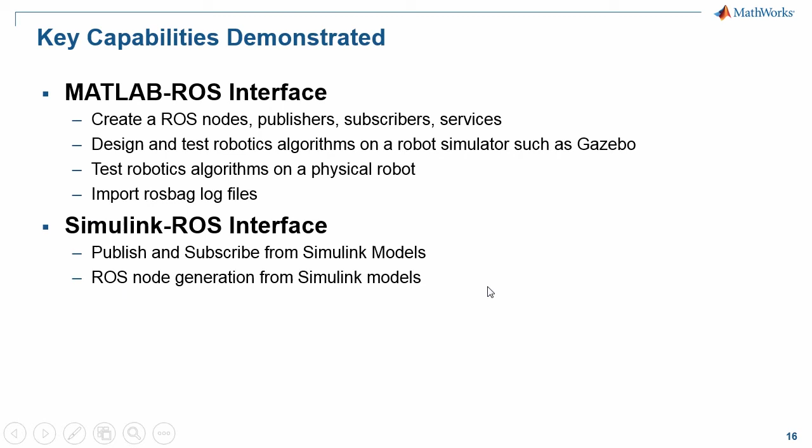We also talked about the Simulink ROS interface. I showed you how you can publish and subscribe from Simulink models and how easy it is to visualize the communication layer and the algorithmic layer from your model. And if you have our coder tools, you can also generate a standalone ROS node that will run on the simulator or on the robot.

And we also talked about the algorithms in Robotics System Toolbox - how you can now represent maps as binary occupancy grids, how you can use a probabilistic roadmap planner to do path planning, and how you can use our pure pursuit controller to drive a differential robot and do path tracking. I also mentioned that Robotics System Toolbox comes with coordinate system transformations, so now you can convert from quaternion to homogeneous matrices or Euler angles or angle axis representations.

I would like to finish my talk today showing you other applications that we have developed using the features of Robotics System Toolbox that I just showed you.

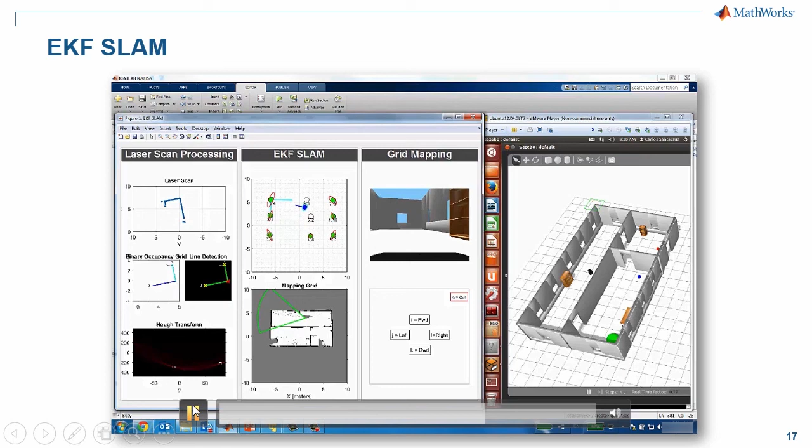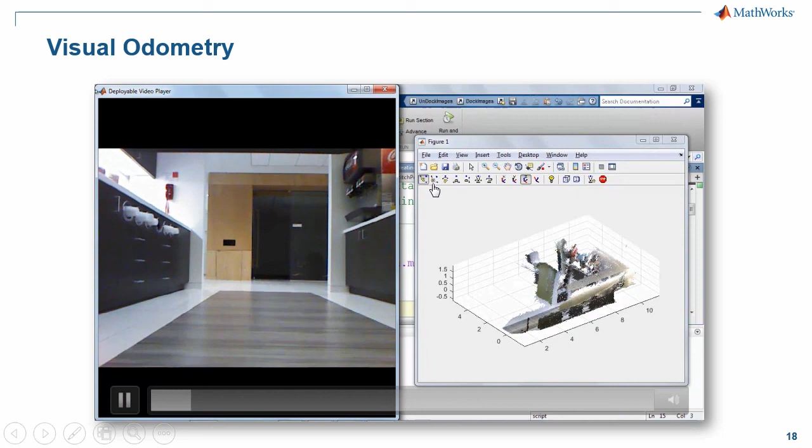Another cool application is visual odometry. Here we are leveraging capabilities of Computer Vision System Toolbox, especially the point cloud processing. So we have here a Turtlebot that is navigating through a kitchen. We are using, of course, Robotics System Toolbox to connect to this Turtlebot and get the point cloud data.

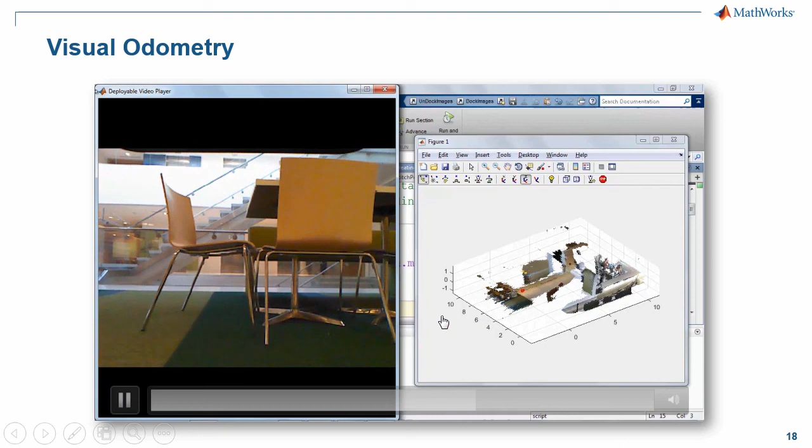And here we can see how we're doing point cloud stitching to create a 3D representation of that environment, and also how the robot is using this information to localize itself - that's why it's called visual odometry. This is also a very advanced robotics application that now you can develop using the different capabilities from MATLAB, Simulink, and Robotics System Toolbox. And here, for example, if you're doing computer vision, you can also use Computer Vision System Toolbox.

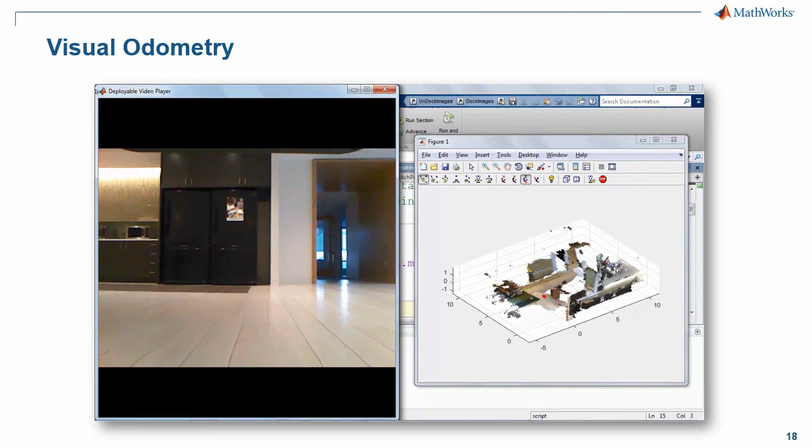Now it's your turn. I've shown you different applications. I know that you maybe are doing controls, probably you're doing computer vision, image processing - it's your turn to design very advanced or cool robotics applications. I hope you enjoyed all the features I showed you today, and thank you for your attention.